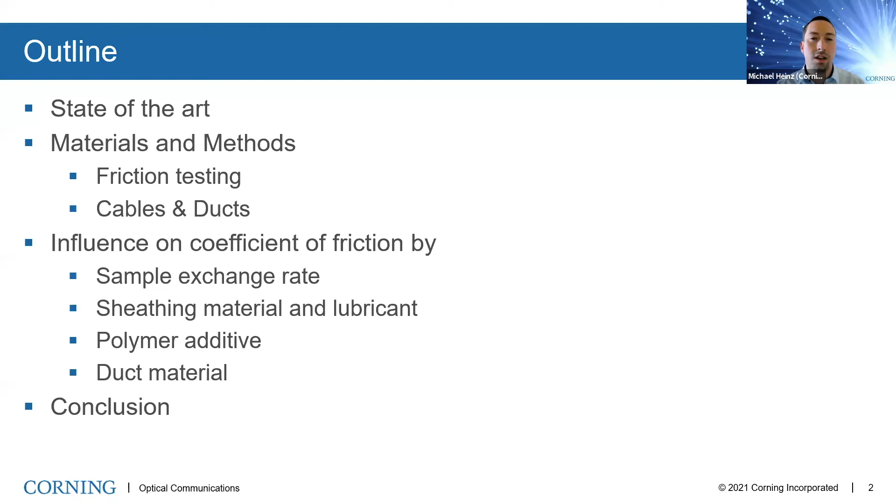We did a lot of work to investigate the different effects on cable friction, especially different kinds of cable materials, duct materials, and a certain amount of extended testing. First of all, I want to quickly go through the state of the art and the reason why we did this work, giving you an overview of the different materials and methodology we applied, especially regarding friction testing, and also the different cable and duct materials, to avoid getting too confusing, because we tried several hundred combinations of tests. Then we'll go directly to the results, where we want to understand the influence of the coefficient of friction on one hand by the sample exchange rate, but also the sheathing materials, lubricants, additives used, and the duct materials.

Overall, the big question to clarify is: why do we want to understand the coefficient of friction of cables? This is mainly of interest in the blowing, pulling, and pushing methodology of installing a cable into pre-installed ducts.

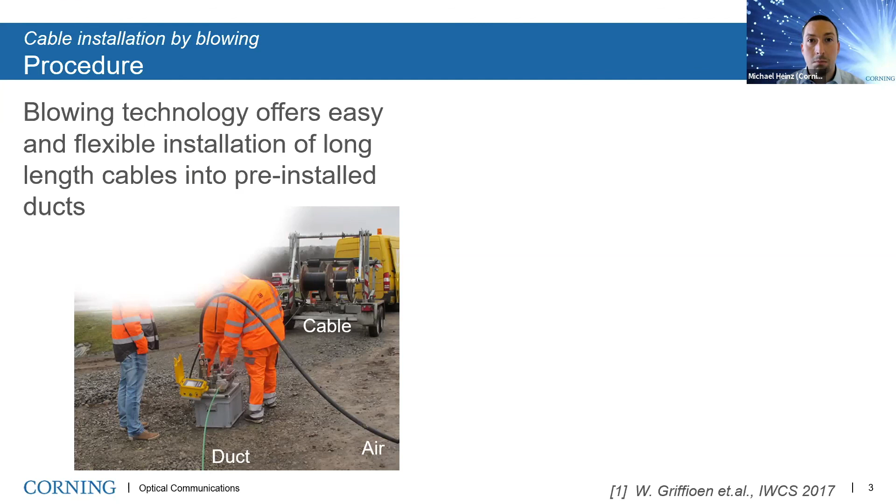For example, the blowing technology, you can see here, where a cable, still on the drum, is pushed into a duct and flows in there on an air stream. This is the so-called blowing technology. You can install several kilometers of cable into pre-installed ducts, which gives you very high flexibility in regard of sample exchange, but also the installation of cables maybe a bit later, so you have some opportunity there.

To do that, you need a blowing device, which consists of a caterpillar and a machine that controls the cable installation speed, and also the compressed air, to get the right ratio of parameters. Looking at this in a schematic overview, the caterpillar on the left pushes the cable into a blowing head, where the cable is confronted with compressed air and pushed into the duct, flowing there on a certain airstream. From a certain length of cable installed in the duct, a drag force is created by the compressed air and the cable is pulled in, but until then, you need to push with a certain force into the duct.

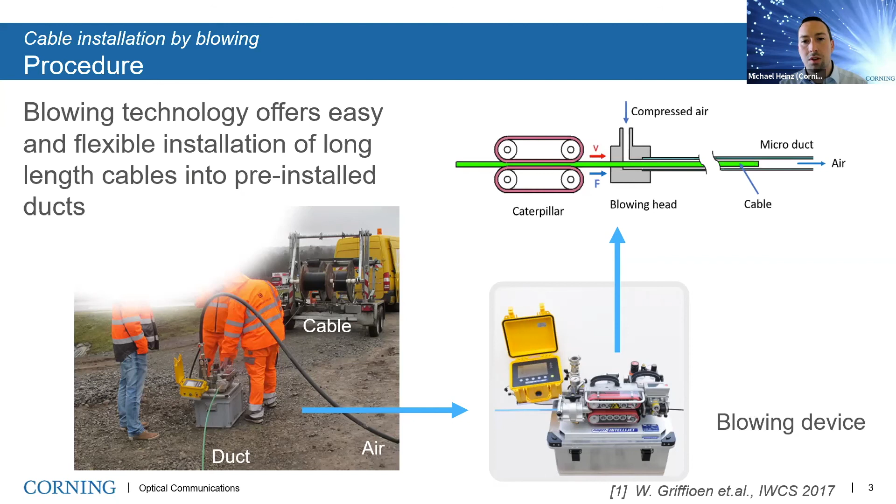Of course, things don't always go well. So we need to understand that when we push the cable into the duct, we are faced with friction of the cable and the duct.

If the cable friction exceeds a certain value, we have two failure modes: on the one hand, buckling of the cable in the duct, which can cause attenuation increase on fiber optic cables, and on the other hand, kinking, which is by far more critical, damaging the cable. In the real installation world, it looks like this.

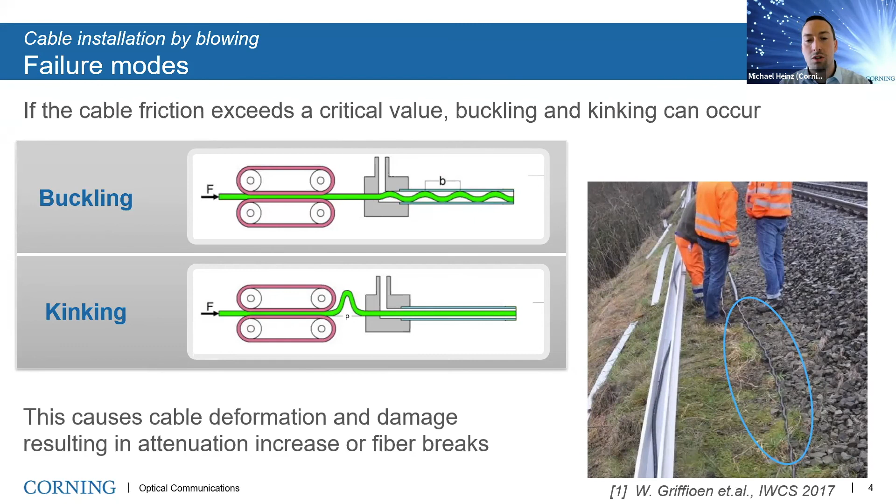So we have the kinking here on the bottom right, where the cable then stops and cannot be pushed further. So to avoid this kind of cable damage and breaks, we need to understand how we can reduce the coefficient of friction and what in general affects the whole blowing performance.

In advance of this work, I investigated literature and identified more than 15 laboratory scale test methods to determine coefficient of friction. So we're not talking about a universal test method, especially not for cable and cable installation.

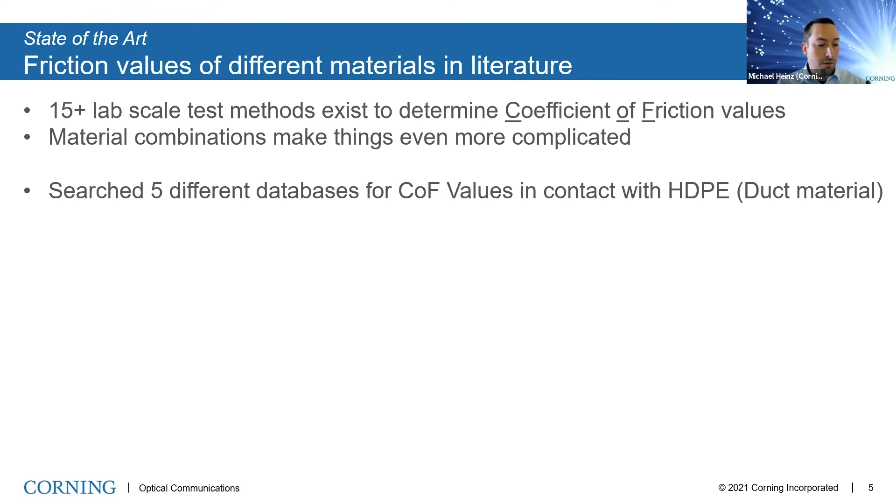If we then move to different material combinations of different types of material, things get even more complicated. In the end, I ended up with 5 different databases for coefficient of friction values of material in contact with HDPE, because HDPE is the material that the ducts are made of. I looked for these values with the minimum and maximum values that these databases gave me.

We started with HDPE against itself, and based on the database, you can either use the value of 0.1 to the value of 0.45, which I would say is a pretty decent difference.

If we talk about polyamides, which are expected to have reduced friction - at least that's what the suppliers tell us - we talk about minimum values of 0.13, but even max values of 0.7. Steel seems to be a bit better in regard of the scattering or deviation.

But one funny part was, as I was investigating some lubricated steel with HDPE, it seems that the friction is even higher. And then, as a technical person, the very first question coming up is: lubricated with what and how much lubricant? So actually, all my literature research just came up with more questions than answers. I had a very unclear picture.

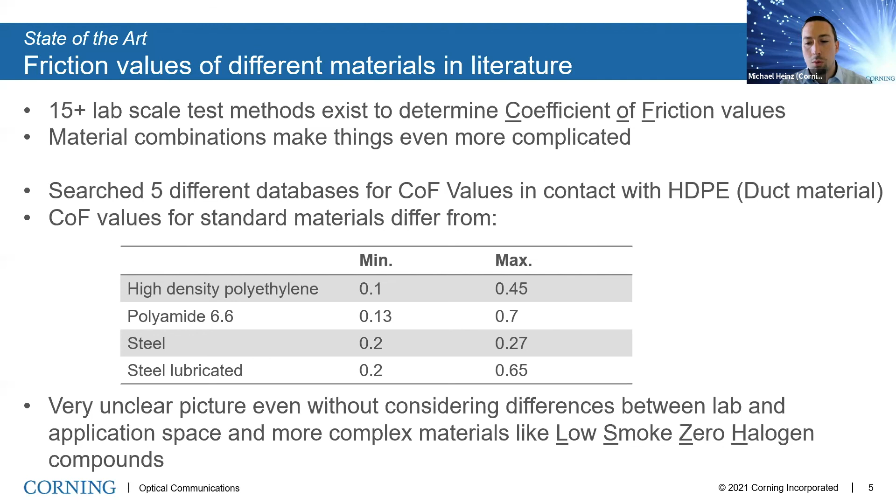And even without considering different material mixtures, like for example low smoke, zero halogen compounds, where we have a mixture of different polymers and properties.

So we used a test method in IEC TR 62470, which is the friction of a cable in a duct. This is not a standard, this is rather a recommendation of a test method.

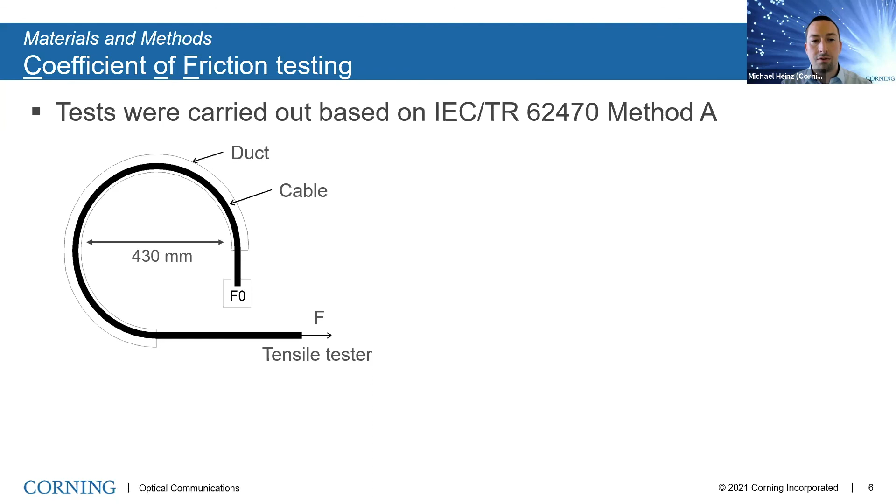We applied a duct, which is wrapped around a mandrel, in our case with a diameter of 430 millimeters. You have a load at the end, which is F0 here, and which ensures that the cable is always in touch with the inner part of the duct.

The other end is fixed to a tensile tester, and we have a measured force. We pull the whole thing 300 millimeters, and we average the force between 50 and 300, so that we get rid of the initial friction force that is higher due to the stick slip effect. The coefficient of friction is then calculated by this equation here, and then can be directly compared.

But the thing is, the standard is only a recommendation. It does not give us instruction about how many samples we should test, how often we should exchange the samples, or even the ducts.

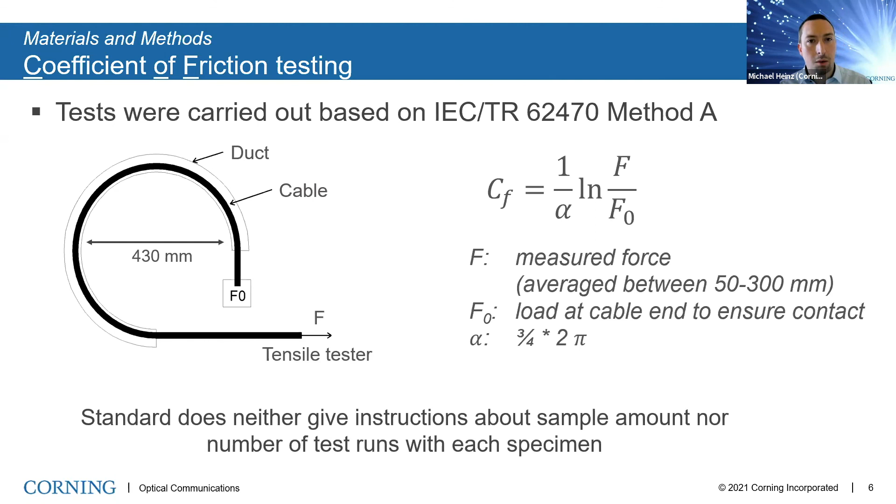So we used different cables to investigate this, starting with micro cables with a small outer diameter. They mainly differ in the jacket material and in the outer diameter. We talk about HDPE on the left hand with microcable 1, and halogen-free flame retardant compounds like low smoke zero halogen for an indoor cable, because both of them are now installed by blowing, so it's of interest for both. Both have 12 fibers, and the diameter differs from 2.5 to 3.

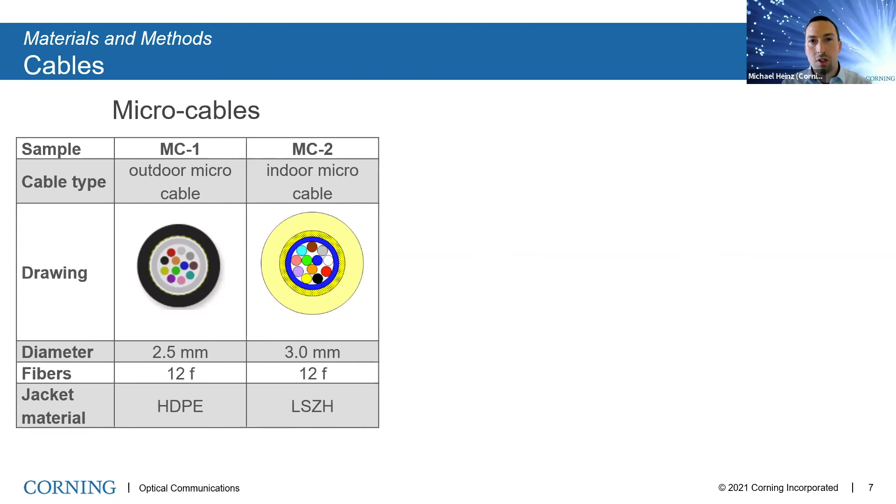Of course, now you could say the diameter is a very important part, because of this free space in the duct. So that's why we also moved to a bit larger cable, which is a 96 fiber MiniXtend cable.

We produced 5 different cables with the same outer diameter, the same cable core, everything the same, just with different jacket materials. MX1 has a jacket material of high density polyethylene. MX3 has a polyamide 12, and MX4 is a low smoke zero halogen cable compound.

We also incorporated 2 different kinds of polymeric additives to further reduce the coefficient of friction, to understand how we can affect the coefficient of friction by addition of a polymeric additive, which is an ultra high molecular weight siloxane. This is only miscible with a polyethylene base, so we added it in MX2 to the HDPE, and in MX5 to the low smoke zero halogen compound, because this one is based on EVA LLDPE compounds.

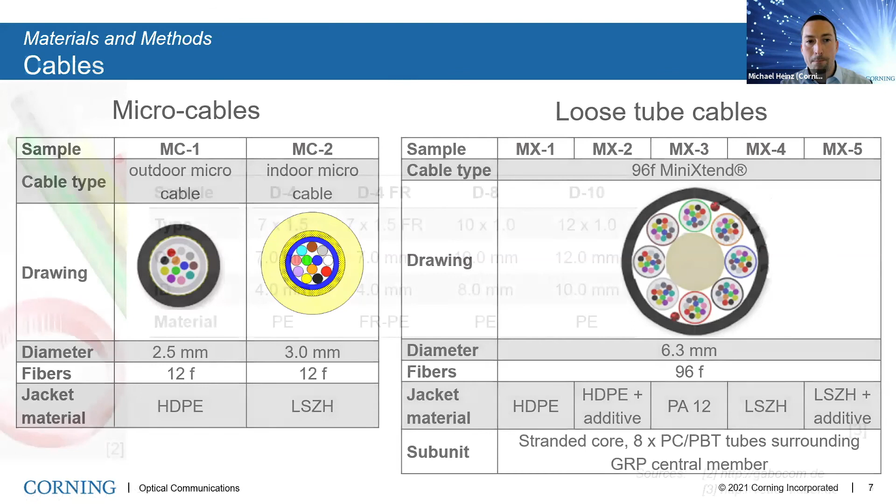Of course, we do not only vary the cables, we also varied the ducts. We started with ducts for microcables. The duct name is always the inner diameter of the free space, meaning a D4 has an inner diameter of 4 millimeters and is made of polyethylene. We also tried a D4FR, which is a flame retardant polyethylene, because this is mainly used for indoor installation in buildings when we talk about these microcables.

The loose tube cables that we used, these MiniXtend cables, do not need to be flame retardant, because we talk about outdoor cables. So we varied 2 different duct sizes, 8 and 10 millimeter. Furthermore, to be more realistic, we also performed all the tests dry and with a blowing lubricant applied on the sample to understand the effect of the lubricant.

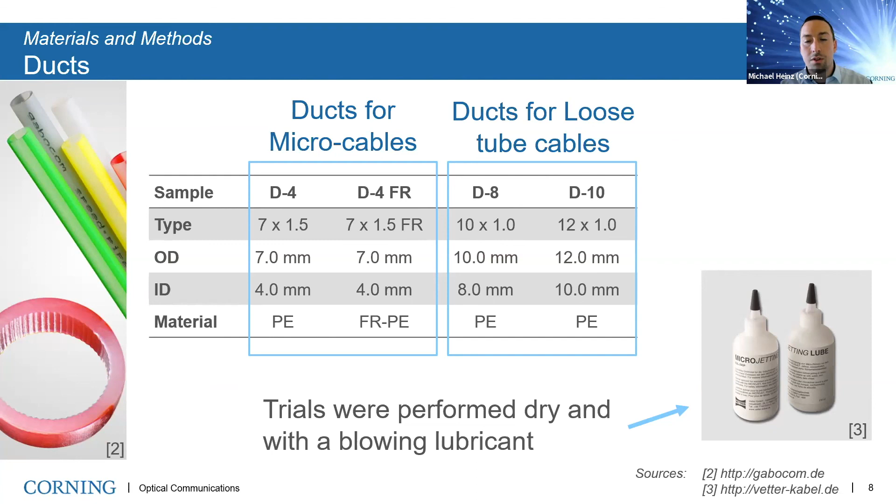Before we started, we investigated the sample test method, as I already mentioned, since it is not yet really clear how often to exchange the sample or not. I'll show you a lot of graphs now in the next slides, and you will always see on the y-axis the coefficient of friction, and on the x-axis the number of tests.

For a simple reason, we just repeated the tests one after another, also to investigate how the sample is affected over long-term blowing, because we do not only talk about 1 meter blowing, we want to blow several kilometers. So we want to have some long-term effects.

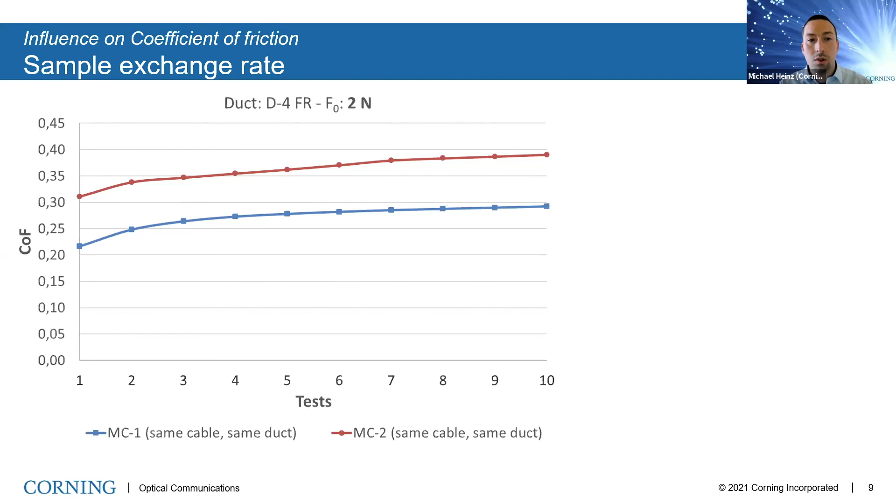We have the microcables here, the MC1, the blue curve with HDPE, and the MC2 in the red curve with the low smoke zero halogen cable compound. We repeated the tests 10 times, and we see that the HDPE exhibits less friction than the low smoke zero halogen compound. We expected that because the LSZH compound is a bit more rubbery, more flexible, and not as hard as the HDPE. But for both cables, we see signs of abrasion because the friction increases with every test run, so we have a slight increase in friction over time.

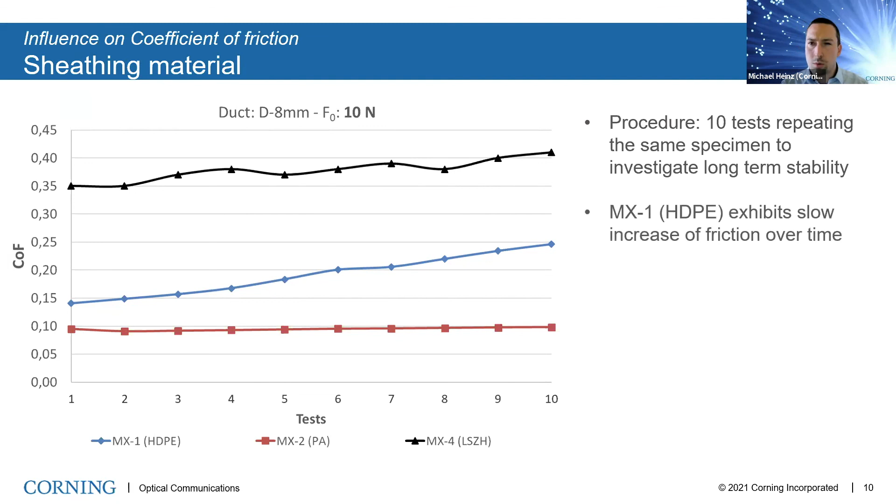Moving forward on the different types of sheathing materials, where we of course stayed with 10 tests repeating the same specimen after another to investigate long-term stability. We have the results here with HDPE in blue, the polyamide in red, and the low smoke zero halogen in black. The HDPE exhibits a slow increase of friction over time, what we just saw. This cannot be seen for the polyamide, and the values of the polyamide are lower than HDPE, so we have a very stable performance at lower force.

The low smoke zero halogen actually was barely movable. It was very difficult to measure, and we see a slight increase of friction over time, but we have noticed that this was at the upper detection limit because of the big cable outer diameter.

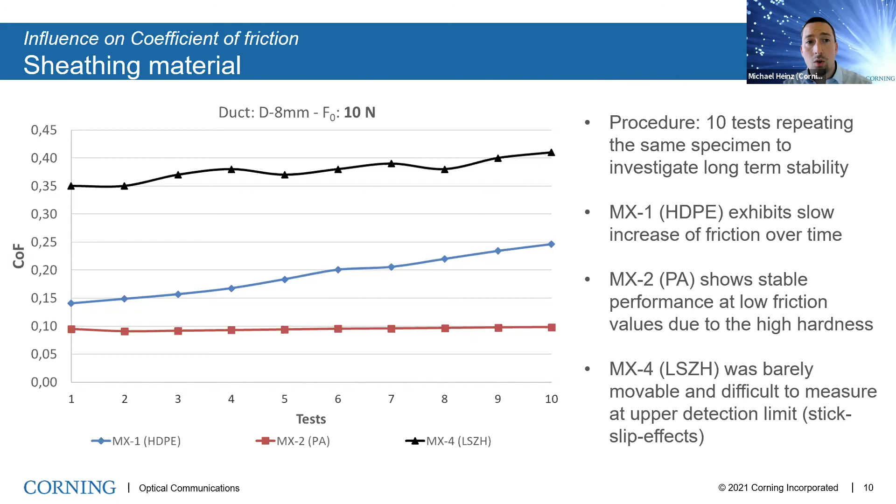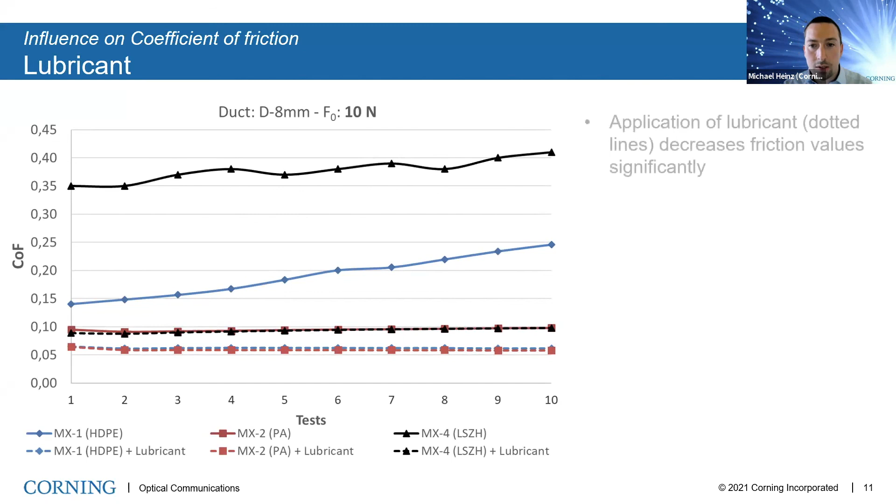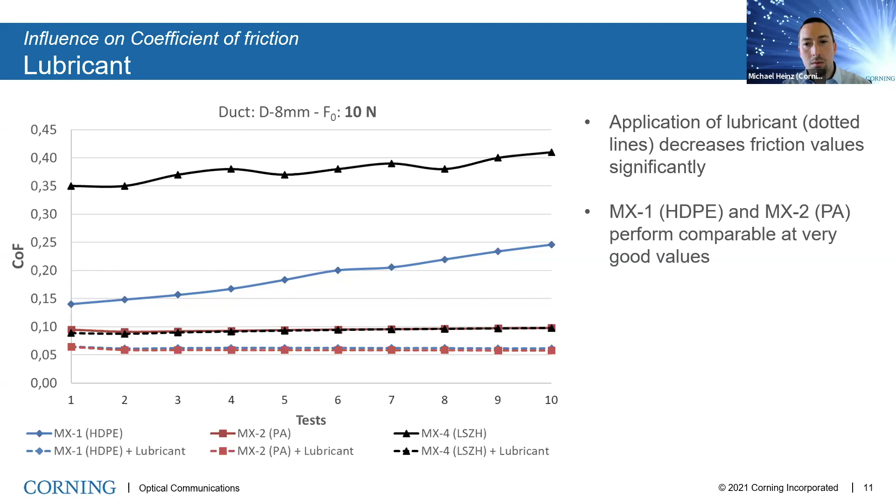Nevertheless, we also then tried to apply a lubricant and tested the same cables with the same 10 repeats. You can see them here, so the results are already added in the graph on the dotted lines. The application of lubricant decreased the friction values significantly for all materials. You can barely differentiate the blue and the red dotted lines because they're just so close. They're very good values, even below 0.1, which is pretty good. For all the cables, all the signs of abrasion are gone.

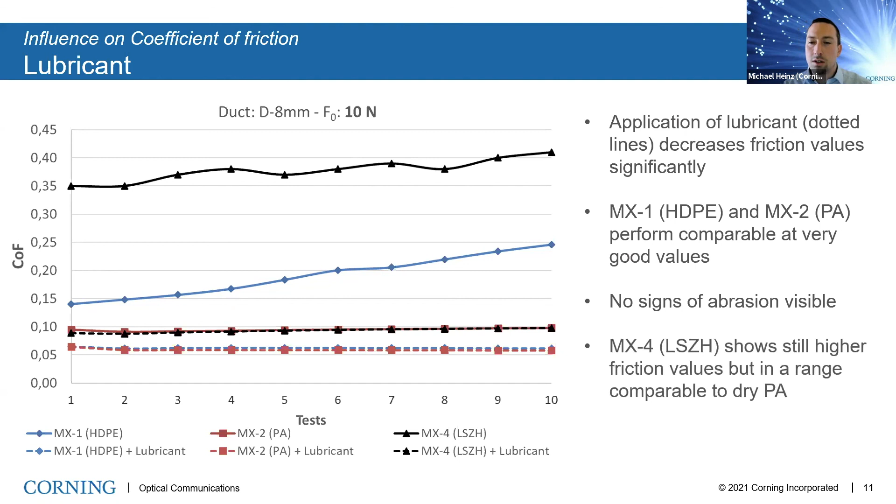The low smoke zero halogen compound still shows higher friction values, but now it's on a level of dry polyamide, which is already pretty good. So I would say the addition of lubricant has very positive effects.

We also tried to modify and influence the coefficient of friction not only by the lubricant, but also by the polymeric additive, which we added into HDPE and LSZH. So the graph changes a little bit to incorporate all the data. The coefficient of friction values here are the average values of all 10 tests, so if we have increased friction and abrasion, this is already added into these values.

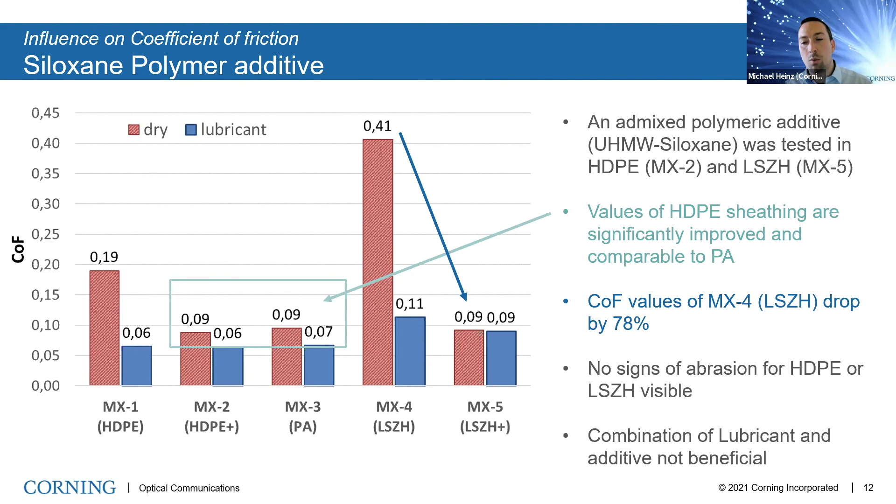Furthermore, on the LSZH material, we see a drop in coefficient of friction by 78%, which is outstanding, on the same level as HDPE with additive. In general, by admixing the polymeric additive, all signs of abrasion were gone. But I need to say that we did not see any benefit in combining lubricant and the additive, so either you take the one or the other approach and you're good to go.

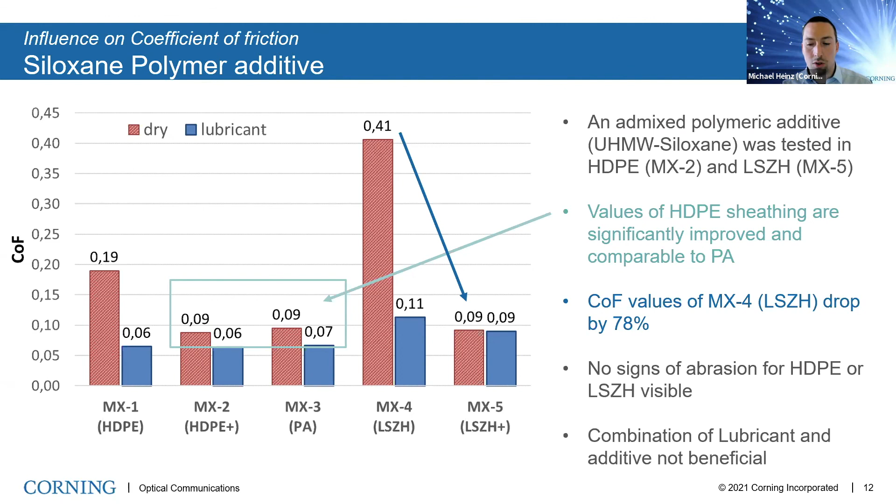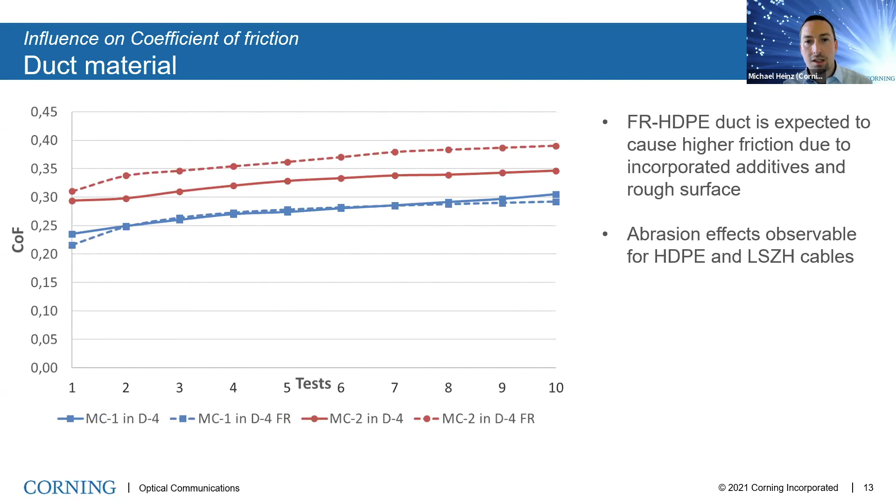So the abrasion effects, you already know them, they are observable on both cables. Now testing in the dotted lines in the flame retardant PE duct, you can see that the LSZH cable is affected by higher friction in the flame retardant duct. But the much harder HDPE sheath on microcable 1 in blue does not show a difference either if it's a polyethylene duct or a flame retardant polyethylene duct.

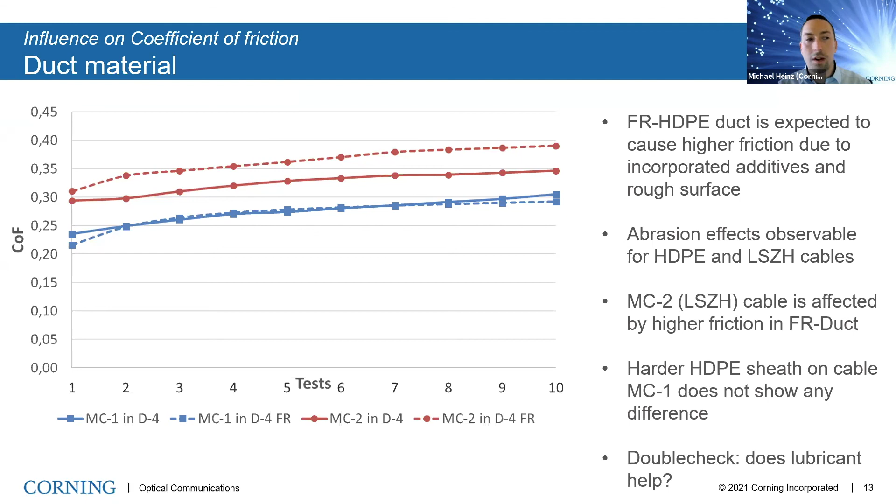Of course, we wanted to understand, does lubricant also help here, and what effect does it have? So we again started testing the different duct materials with lubricants. Again, the dotted lines are the flame retardant ducts, the solid lines are the ducts with lubricant, but the standard PE ducts.

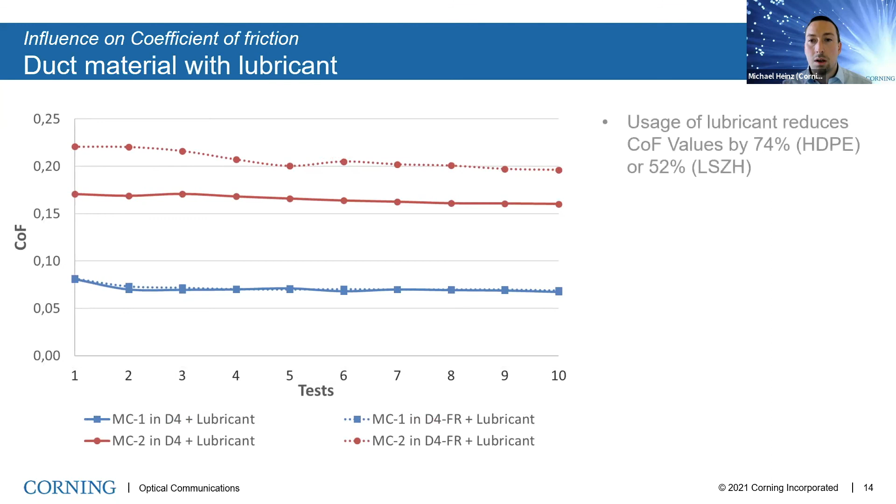In general, all the coefficient of friction values decreased from the slide before a lot, which on the pure HDPE is a 74% coefficient of friction reduction by lubricant, and on the LSZH is 52%. No signs of abrasion are visible anymore, so this fits pretty well to the MiniXtend cables.

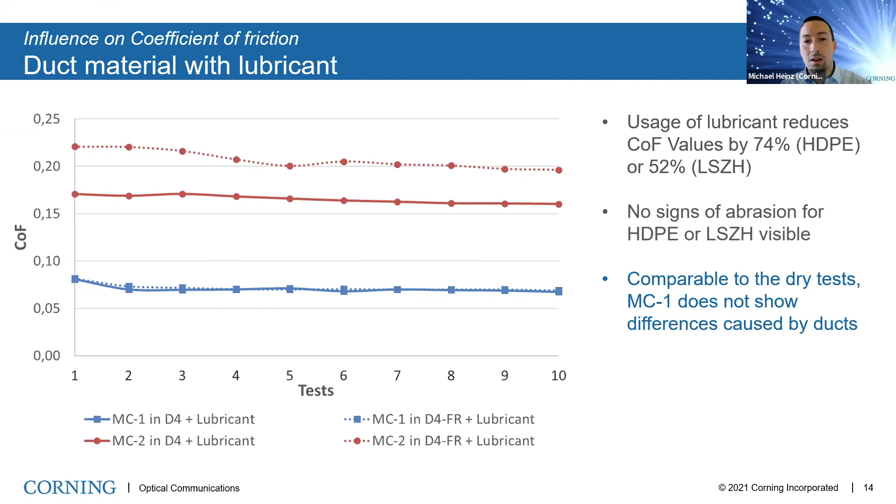Comparable to the dry tests, the HDPE cable does not show any difference, either if it's PE or a flame retardant PE. But for the LSZH, even the lubricant did not avoid the negative influence of the flame retardant duct, which means that the duct with its grooves is not fully covered by the lubricant, so this cannot be overcome.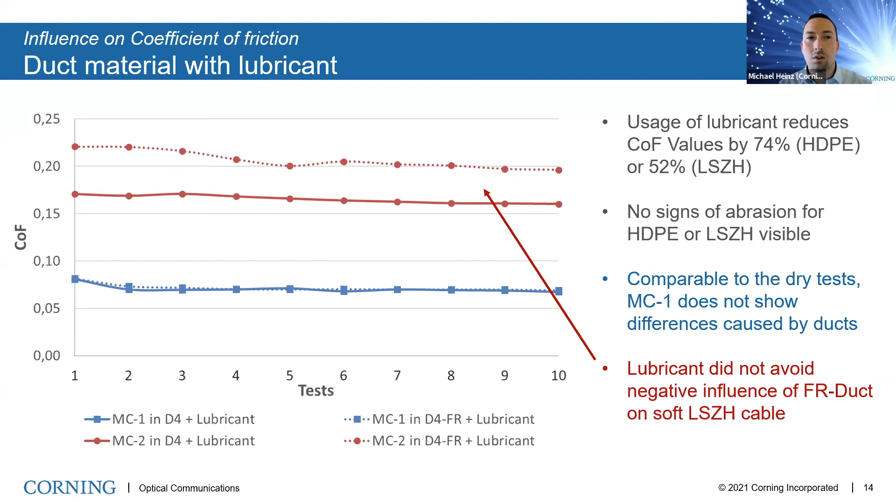So we're already at the end of the talk here, so I want to summarize and conclude all these investigations that I've shown. On the one hand, it was possible to compare coefficient of friction with different materials in the same test setup and cable designs, especially in a very application-oriented test method. By increasing the number of tests with the same specimen, we were able to identify and emphasize effects of wear and to conclude and understand effects for long-distance blowing.

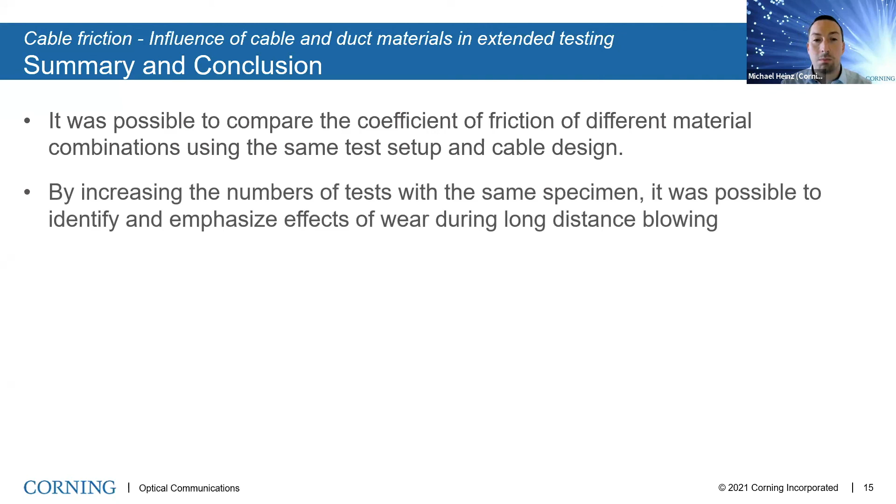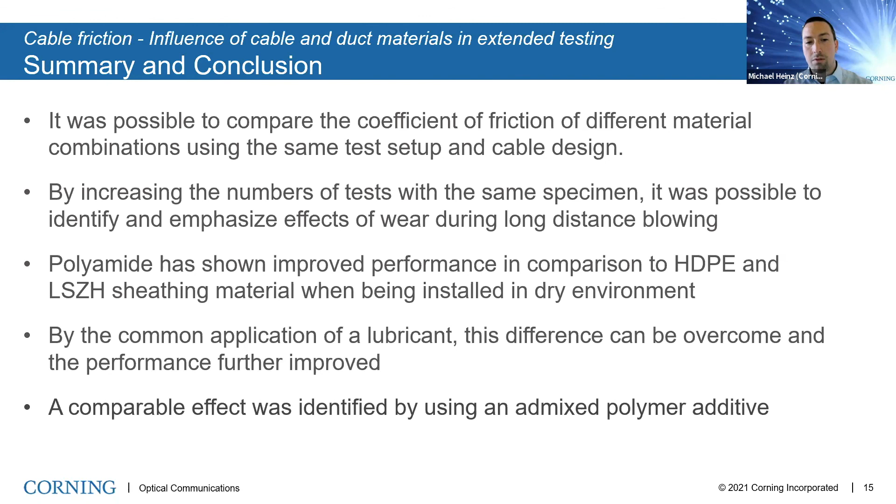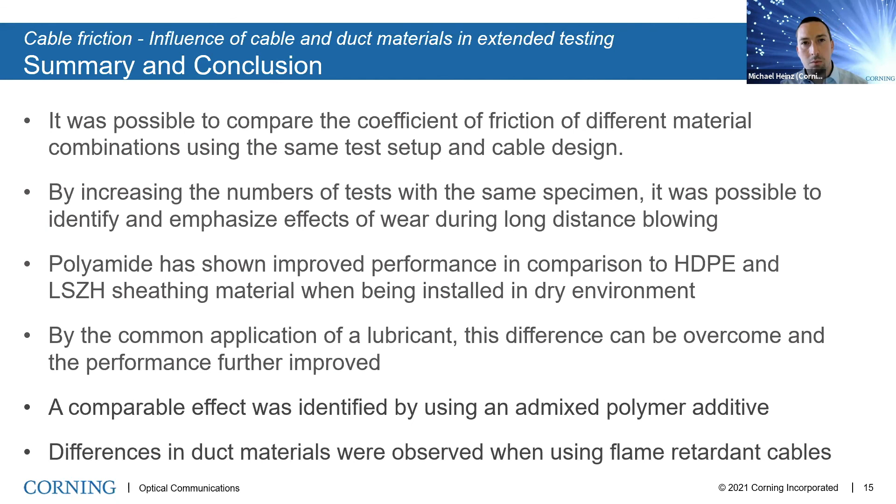The polyamide has shown improved performance in comparison to HDPE and also to the LSZH when we talk about dry environment and being installed there. But by the application of a lubricant, as is normally done during blowing and installation, this difference can be overcome and the performance can be even better. A very comparable effect was also identified by using the admixed polymeric additive. Overall, we also saw that we do not only need to talk about cable materials, we also need to start talking about duct materials, especially when we use the flame retardant cables for the indoor ducts.